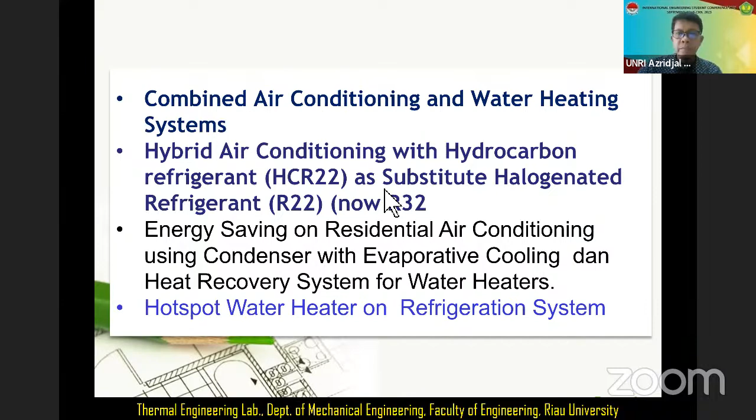Why do we use combined air conditioning and water heating? Because a sizable percentage of electricity generated is consumed by refrigeration and air conditioning systems. In tropical countries, split type air conditioning is generally used in residential and commercial buildings. So in such establishments, electric water heaters are often used to generate hot water. Both air conditioner and electric water heater are generally the major energy consuming devices in the building.

Refrigeration and air conditioning consume around 50% of home electricity and around 19% for water heating. If we combine the use of refrigeration and water heating in one system, we can decrease electricity use in the home.

We can see this vapor refrigeration component, or refrigeration cooling system. We can make efficiency improvements in the condenser component.

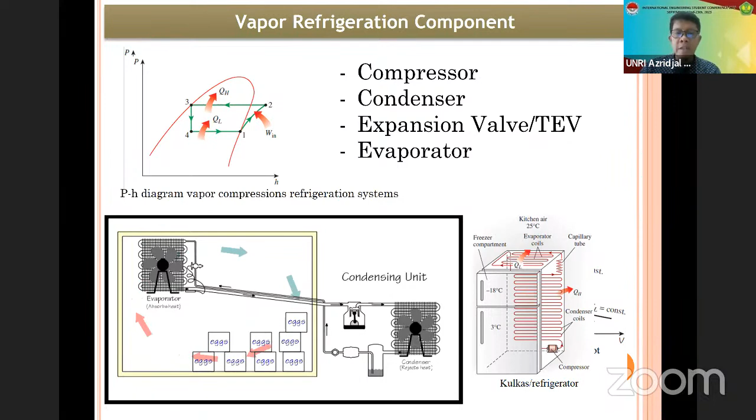If we use a refrigeration system for a cold refrigerated space, we call it a refrigerator. If we use a refrigeration system to warm a house, we call it a heat pump. If we combine the heat pump and refrigerator, we call it a combined refrigeration system. In this system, the refrigeration system can make a cold refrigerated space and also warm the house.

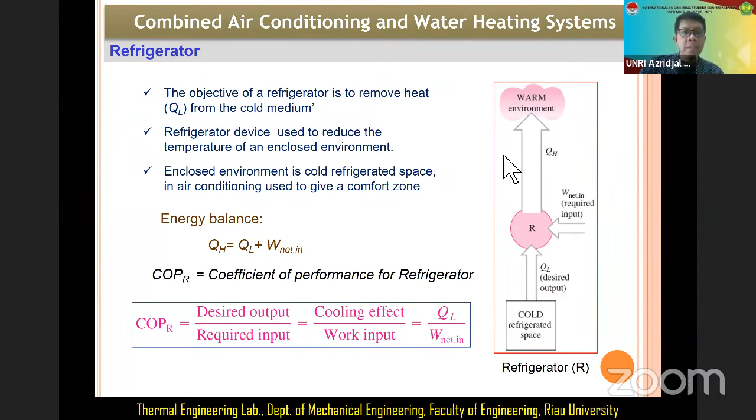This is the combined air conditioning and water heating system: the refrigerator, the heat pump, and the combined refrigerator and heat pump. If we combine refrigerator and heat pump, we can achieve coefficient of performance for both cooling effect and heating effect. This heating effect uses the rejection of energy from the condenser.

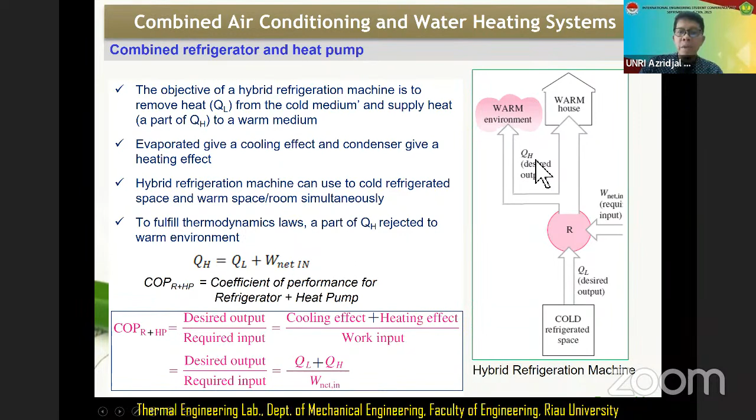This is the main component of a refrigeration system. One is compressor, second is condenser, third is expansion valve, and the fourth is evaporator. The heat rejected from the condenser can be used for heating water, or for drying in other systems.

In this presentation we use heat rejection from the condenser for a water heating system. This area is for heat recovery.

This area is for heat recovery, and if we look at the schematic diagram and TS diagram, the heat recovery is used in this line. We put a heat exchanger between the compressor and condenser, because after the compressor outlet, the temperature of the refrigerant is very high, so we can use this for water heating.

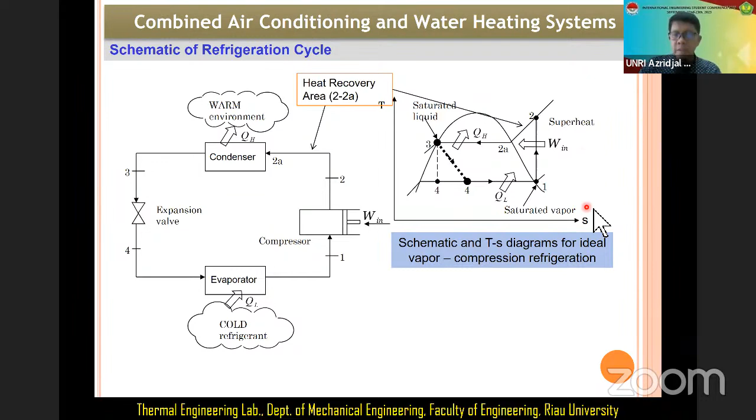This is also the combined refrigeration and air conditioning system. We can use post heat recovery, putting a heat exchanger, or de-superheater, for a reclamation tank to heat water in the tank.

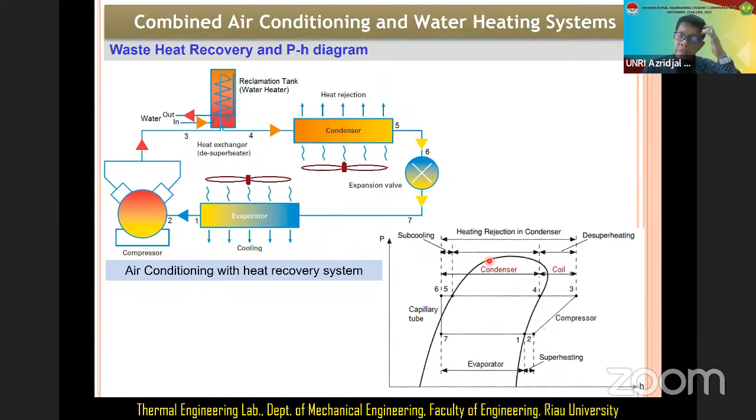After the compressor, we put a water heater reclamation tank, and the refrigerant goes to the water heater tank, and then to the condenser. So the use of this system does not disturb the performance of the existing refrigeration system.

This type of coil condenser can be used in a water heating system, in a water tank, to heat the water in the tank, using the heating effect in the condenser, or the heating effect after the compressor to the condenser.

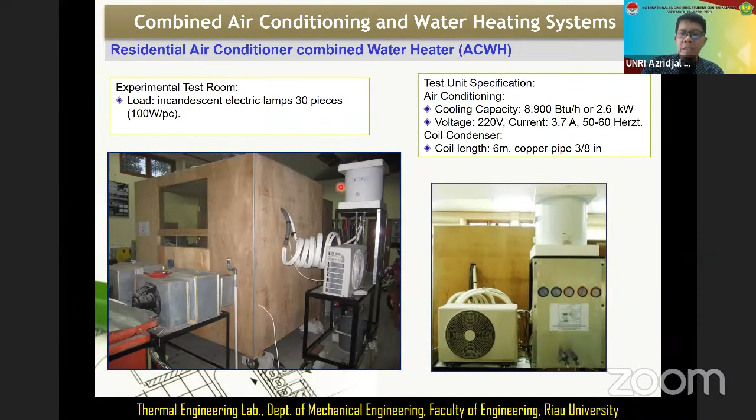Now, going to the conclusion.

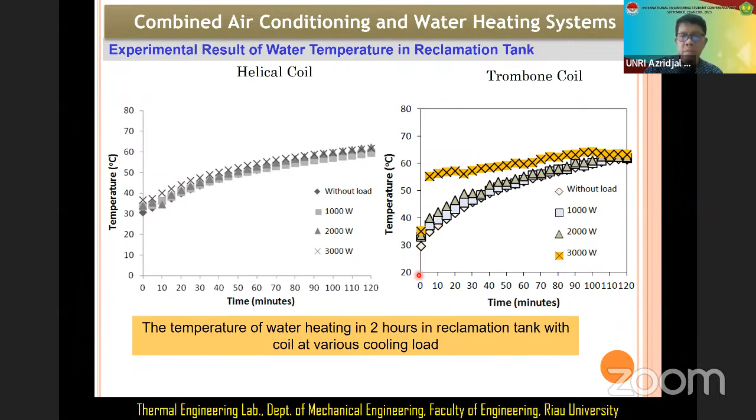In conclusion, we can see the application of air conditioning combined with water heater using coil does not affect the cooling performance, but it can improve energy performance considerably for cooling and heating. The use of trombone coil condenser gives better performance than helical coil condenser. When the cooling load increases, the COP (coefficient of performance) for refrigeration and for heat pump also increases. So we can use this combined air conditioning and water heating system without affecting the cooling performance.

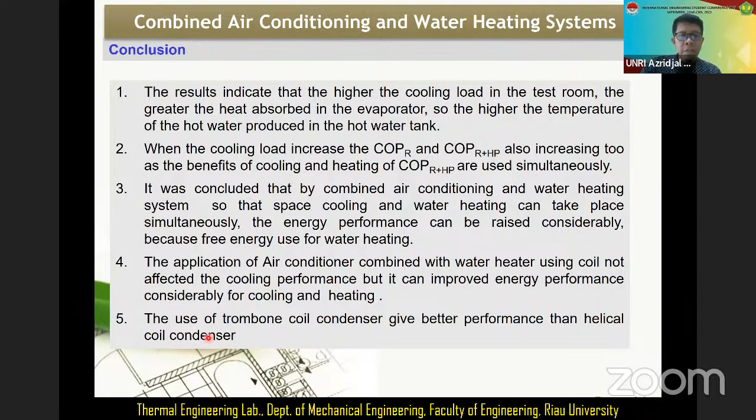Next, for air conditioning with hydrocarbon refrigerant: if we change the refrigerant to a hydrocarbon refrigerant with low GWP and low ozone depleting potential, we can reduce electricity consumption. Previous research shows the application of hydrocarbon refrigerant can reduce electric power consumption by around 10 to 30%. Also, this hydrocarbon refrigerant is environmentally friendly, with zero ozone depletion and very low global warming potential.

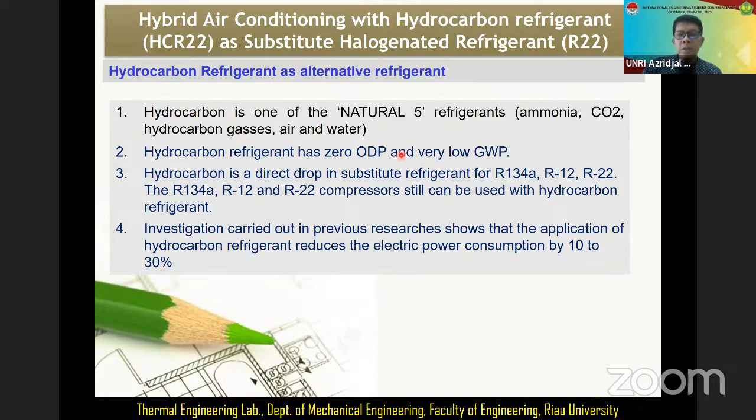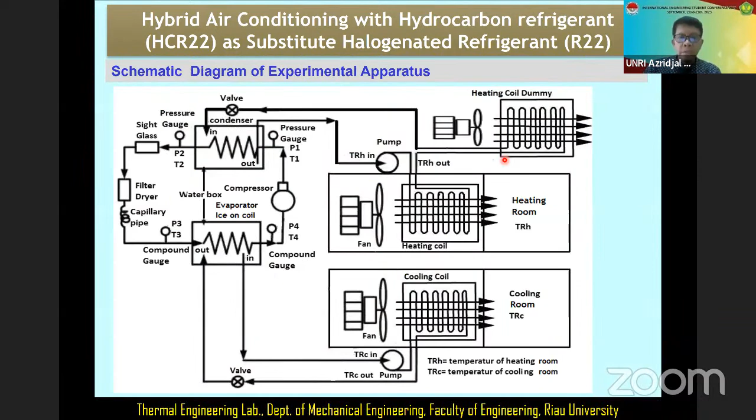This is the advantage of using hydrocarbon as refrigerant. The result is that if we use hydrocarbon refrigerant, the pressure of the condenser is low, and also the pressure of the evaporator is low. If pressure in the condenser, evaporator, or compressor is low, it means the electricity consumption for the compressor is also low. So we can save energy consumption of around 10 to 30%.

Power consumption of the compressor is more efficient, by 25.12% compared to R22, where the condenser and evaporator pressure is also lower than when using R22 refrigerant.

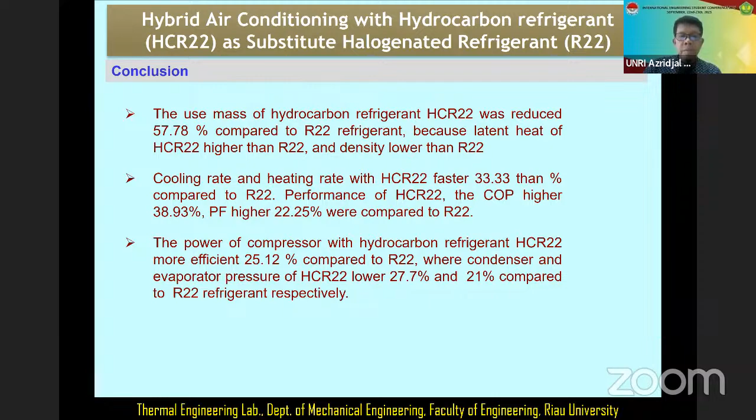Next, this is about energy saving on residential air conditioning using a condenser where we put evaporative cooling in front of the condenser, and we can use a heat recovery system for the water heater. This is similar to the previous research, but we add evaporative cooling to make the air temperature entering the condenser lower than without using evaporative cooling.

If we use evaporative cooling, the temperature entering the condenser can be reduced by around 2 to 5 degrees Celsius. This shows the location to put evaporative cooling to decrease the pressure of the condenser. If we can decrease the condenser pressure, it means we can decrease the electricity consumption for the compressor.

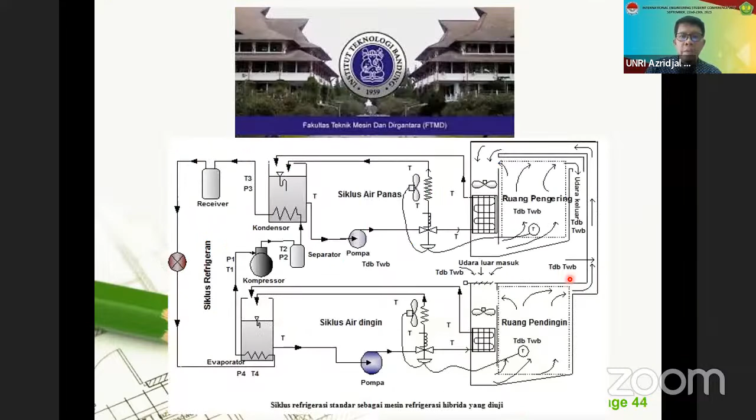We can see that most electricity consumed in conditioning is for human comfort through air conditioning. For hotels it's around 60%, for hospitals around 57%, for shopping malls and government offices around 55%, and in residential homes or office buildings around 47%.

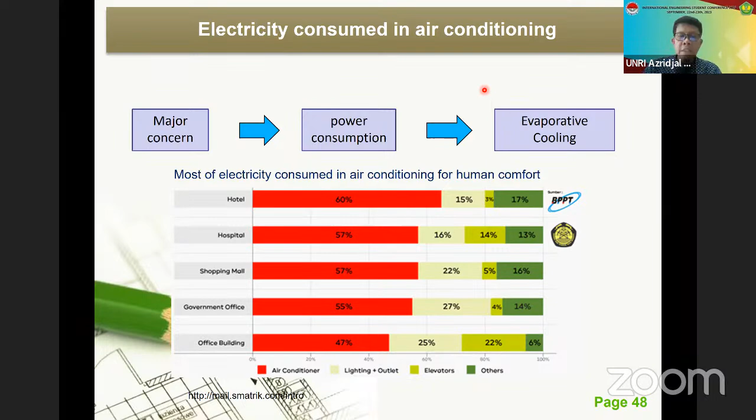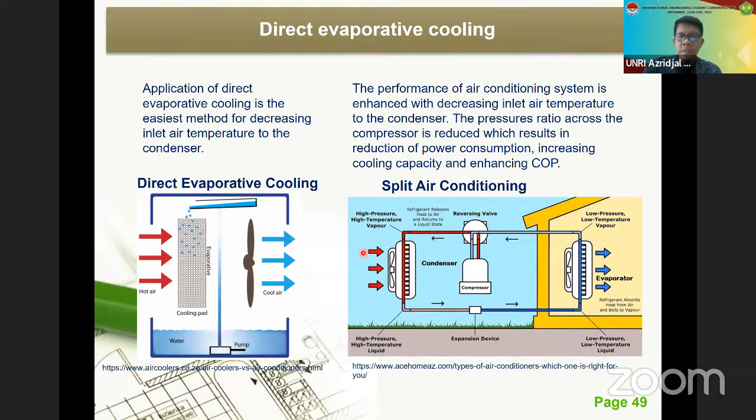If we put evaporative cooling and change the refrigerant, we can decrease the electricity consumption for air conditioning. This type of direct evaporative cooling can be used to decrease temperature before entering the condenser. This is a schematic diagram of split air conditioning with direct evaporative cooling.

To make energy efficiency for the refrigeration system, we can use condensate water from indoor condensation or from the evaporator. We can use this condensate water as the source for direct evaporative cooling. Compressor power consumption decreases due to the decrease in condenser temperature and pressure ratio, which will enhance the overall COP, the coefficient of performance for the refrigeration system.

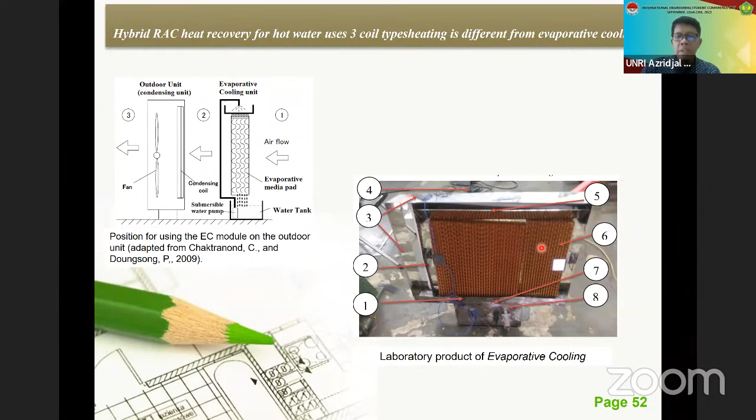We can see this position of the evaporative cooling unit, or modular evaporative cooling. This is the outdoor unit or condensing unit; we put it at the back of the condenser. This is our evaporative cooling product, or module evaporative cooling, that we made in our laboratory.

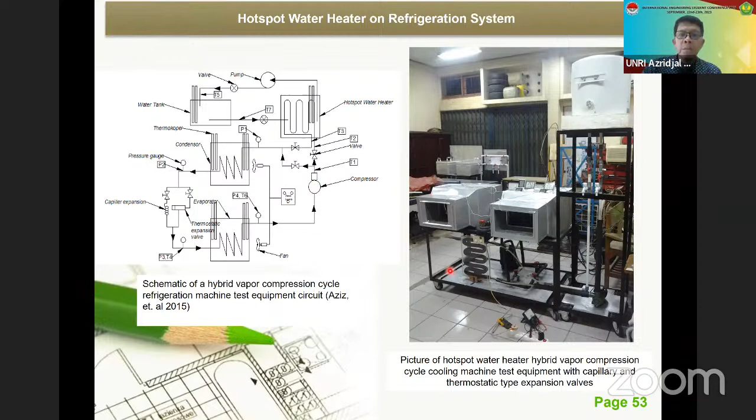In this hot spot water heater system, it's the same as other hot spot water heaters that use hot refrigerant from the compressor to the condenser. This is a photograph of the hot spot water heater in a refrigeration system.

This is a figure of residential air conditioning combined with a water heater system, which enhances the performance of both the water heater and the refrigeration system. Usually now the refrigeration system uses a new model of heat exchanger, with condensers using aluminum micro-channel coil, which is better than condensers with copper pipe coil.

Usually now refrigeration systems use condensers with aluminum micro-channel coil. This is the last part about energy saving on the refrigeration system and air conditioning, where we make modifications in the refrigeration system to save energy for refrigeration and air conditioning.

Why must we save energy in refrigeration systems? Because the use of electricity energy for refrigeration and air conditioning is around 55% for homes, offices, malls, and others using refrigeration systems.

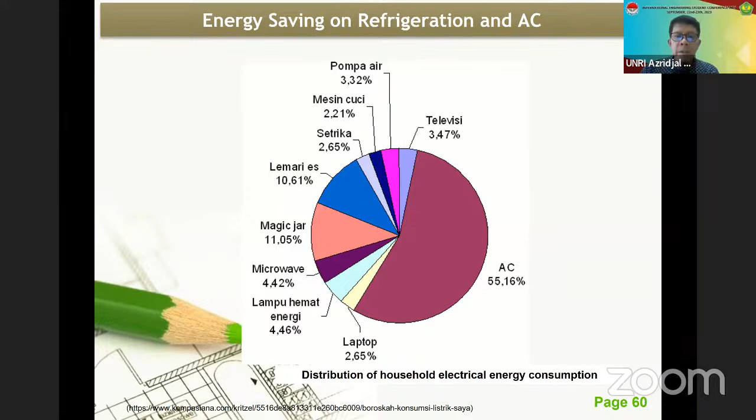Thank you very much, Prof. It's very good and interesting research since we use mostly air conditioning and also refrigerator in our daily life, especially in Padang, it's very hot recently.

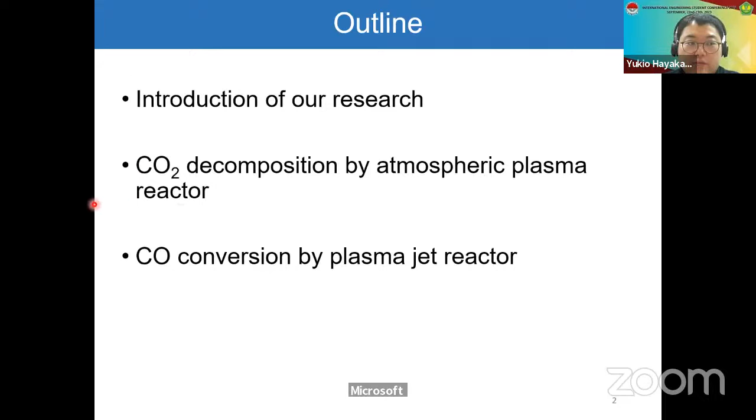My presentation is divided into three parts. First, I will introduce the research in our laboratory. Next, I will present results on CO2 decomposition by plasma. Finally, I will present results on graphite formation from carbon monoxide by plasma jet reaction.

Our laboratory is staffed by two researchers, Professor Kambara and me. Chemical engineering is our field, and we work to solve technical issues related to environmental pollution and energy resources. Recently, our main research topics are hydrogen production from ammonia and carbon dioxide conversion to valuable resources. We use not only chemical processes, but also atmospheric pressure plasma treatment with dielectric barrier discharge called DBD, and photochemical reaction processes with vacuum ultraviolet rays. Today we will talk about CO2 conversion topics related to CO2 processing by atmospheric pressure plasma.

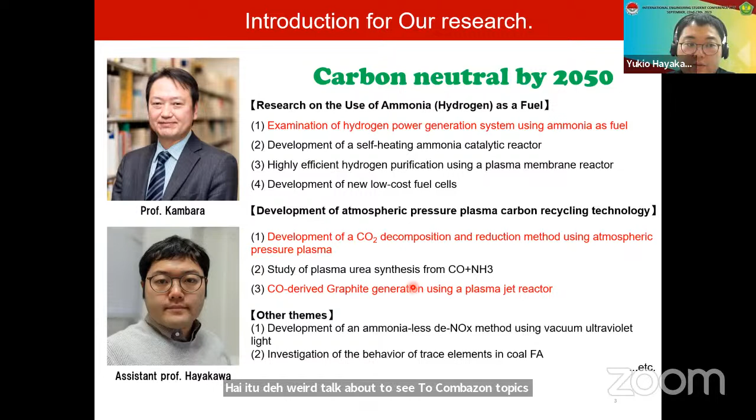Now let's move on to the main issue. I will present CO2 decomposition by atmospheric pressure plasma reactor. Let us begin with the social background of this study. There are many concerns regarding CO2 emissions. CO2 emissions from industrial sites, power plants, homes, and transportation are widely considered responsible for global warming. The high concentration of CO2 in the atmosphere is the main reason for global warming, the global temperature increase, and associated climate change.

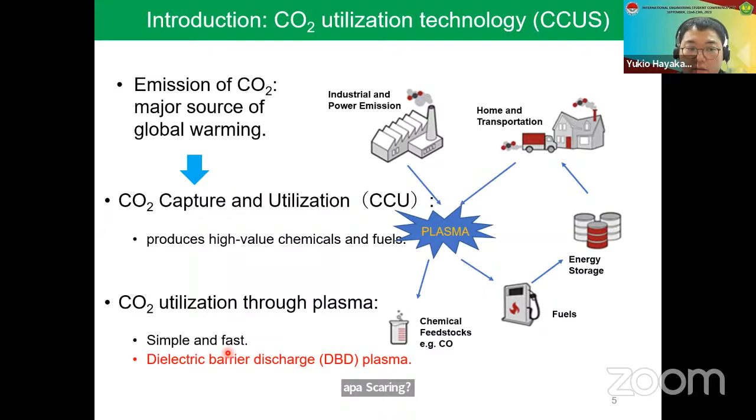One of the solutions to this greenhouse gas problem is carbon capture and utilization techniques, called CCU. CO2 emissions are captured and then utilized to produce high-value chemicals and fuels. For this purpose, non-thermal plasma is a promising method, especially DBD plasma. In recent years, DBD reactors have attracted widespread interest for CO2 conversion due to their simple design, which is beneficial for upscaling for real applications. In addition, these reactors are easy to turn on and off by controlling the electrical power supply.

So now let's move on to the DBD plasma CO2 decomposition. DBD is the electrical discharge between two electrodes separated by an insulating dielectric barrier. The plasma discharge in DBD reactors presents a filamentary form that consists of micro discharges.

When CO2 gas passes through this discharge, it faces a high concentration of plasma electrons, resulting in CO2 dissociation by electron impact reaction. This reaction produces carbon monoxide and oxygen gas, CO and O2. Furthermore, these reactors typically operate at atmospheric pressure and near room temperature.

The main reaction for CO2 decomposition is electron impact reaction, with an activation energy of about 7 electron volts. Whereas DBD can provide electron energy in the range from 1 to 10 electron volts.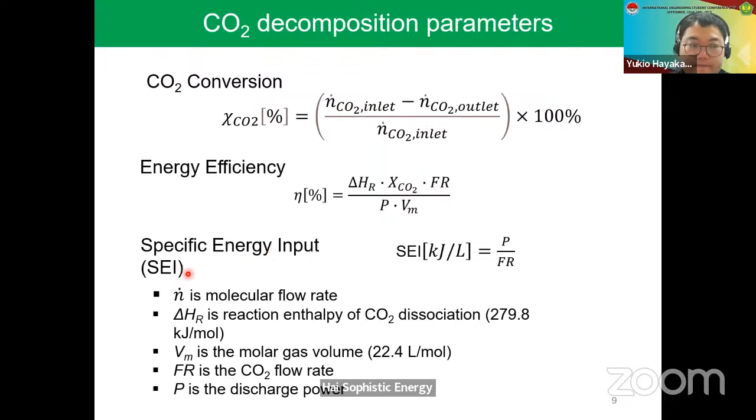Here we can see the applied voltage and current waveform of the impulse DBD reactor. Both the rise time and the fall time of impulse voltage are about 2 microseconds, with a pulse repetition frequency of 10 kilohertz. The impulse power supply is manufactured by Haiden Laboratories in Japan.

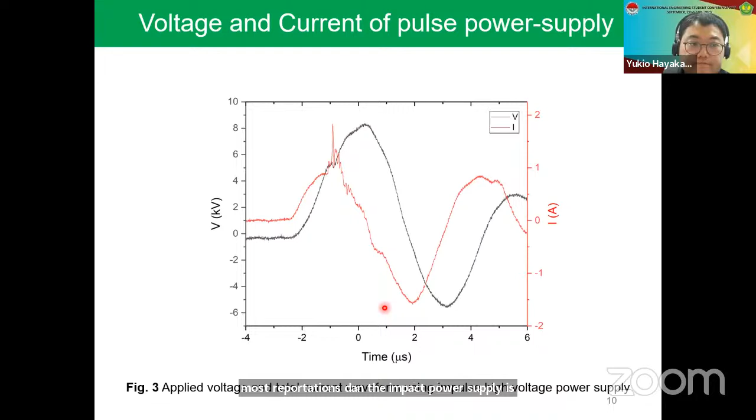So first, let's look at the effect of discharge power on the CO2 decomposition. This graph shows the influence of discharge power on CO2 conversion and energy efficiency. Increasing discharge power increased CO2 conversion, but decreased the energy efficiency. A trade-off relationship between CO2 conversion and energy efficiency can clearly be seen, where a high CO2 conversion is achieved at low energy efficiency.

For example, CO2 conversion increases from 10.17% to 20.25%, as the discharge power changed from 34 to 101 watts, whereas the energy efficiency decreased from 6.47 to 4.17%. This is a technical issue of CO2 dissociation by atmospheric pressure plasma.

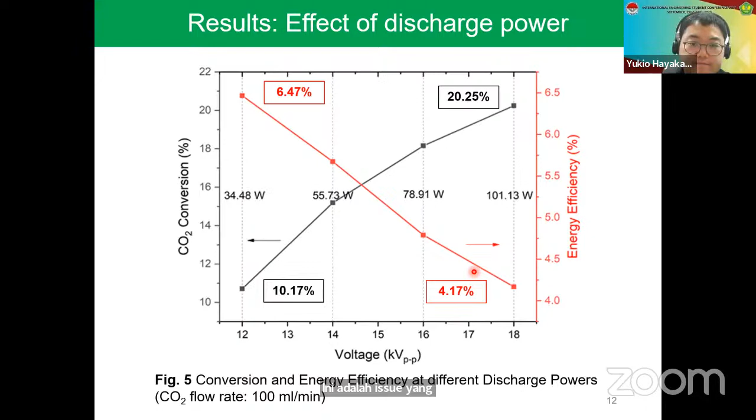This figure shows the current waveform for different discharge power. The non-streamer formation was observed at the applied voltage of 12 kV.

Increasing the applied voltage to 14 kV produced the streamer formation, changing the discharge regime to a combination of uniform and filamentary mode. The formation of the streamers suggests electron impact reaction channels for CO2 dissociation. In addition, a higher current peak means a higher density of electrons and ions, resulting in more reactive plasma. This condition might contribute to the higher CO2 conversion at a higher discharge power.

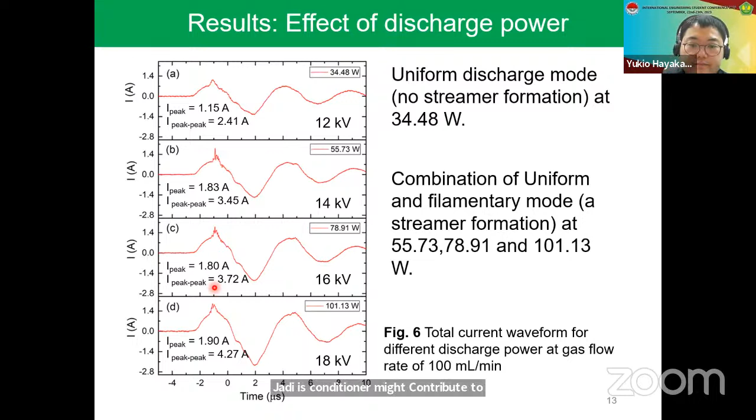Furthermore, the discharge power of the impulse DBD does not affect the streamer intensity. This is a contrast with the conventional alternating current DBD, where low discharge power and high discharge power differ. However, increasing discharge power gives rise to the peak value of streamer and the overall peak-to-peak value of discharge current.

Let's look at the effect of the gas flow rate as shown in this graph. The residence time of CO2 gases in the plasma reactor decreased from 9.7 seconds to 1.9 seconds as the flow rate increased from 20 to 100 milliliters per minute. And the CO2 conversion decreased from 51.42% to 15%. The reduced residence time of reactants in the plasma decreases the possibility of collision with electrons and chemical reactive species, consequently lowering the CO2 conversion.

On the other hand, energy efficiency of reaction was increased from 4.1% to 7.2% by increasing the feed flow rate. However, further increase of the gas flow rate to 100 milliliters per minute reduced the energy efficiency. This lower energy efficiency is due to considerably lower CO2 conversion value at a gas flow rate of 100 milliliters per minute.

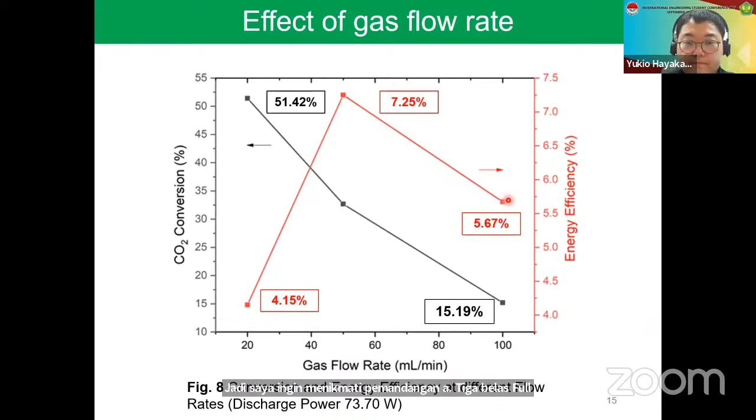Now let's look at the last part of the experimental results, which is the effect of specific energy input, SEI. The variation of SEI can be achieved by changing the discharge power and gas flow rate. How we change the SEI has a different influence on the CO2 conversion and energy efficiency. From figure 10, we can see that changing the SEI by varying the gas flow rate results in a better increase, from black symbol to blue symbol.

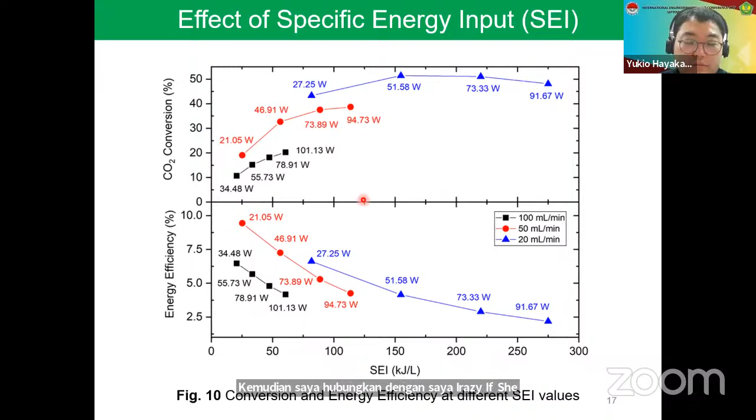This slide shows a summary of the CO2 decomposition by DBD. A very high CO2 decomposition rate, about 50%, was obtained by combining the microgap DBD with an impulse power supply. The gas flow rate and the streamer intensity were found to play a more dominant role in CO2 conversion than discharge power or peak-to-peak current. For future research, the impulse power parameters such as rise time and repetition frequency need to be optimized to increase the energy efficiency.

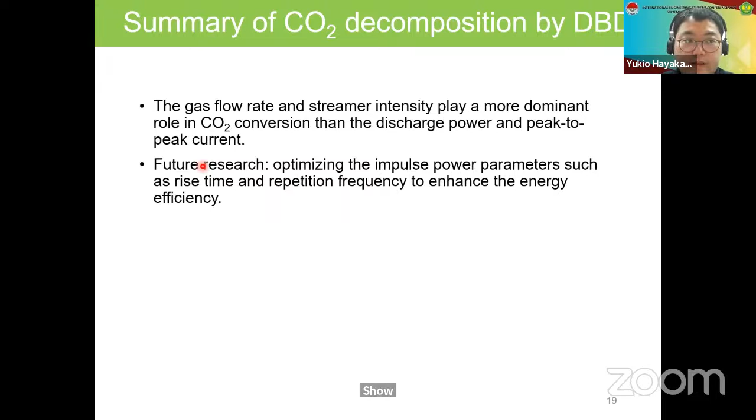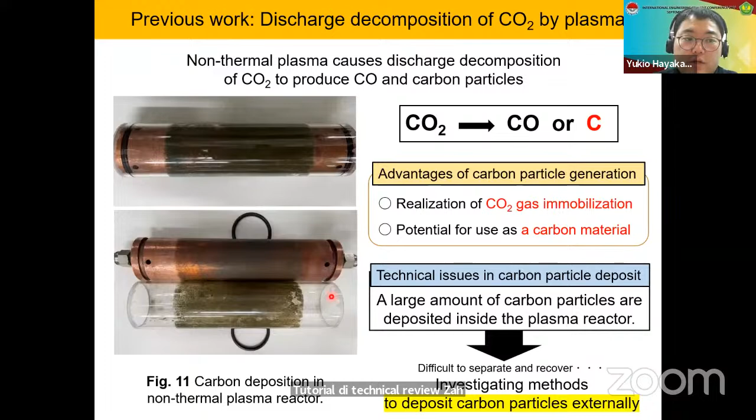To solve this technical issue, the adaptation of plasma jet technology was investigated as a method to separate and recover carbon particles. The plasma jet is a method that can irradiate the excited gas by DBD to the outside, as shown in figure 12. Figure 13 shows a photograph of a plasma jet in which argon plasma is externally irradiated from the device. Various types of plasma can be radiated to the outside by a plasma jet reactor. In this study, external deposition of carbon was attempted by irradiating carbon monoxide plasma onto an outside target for carbon particle deposition.

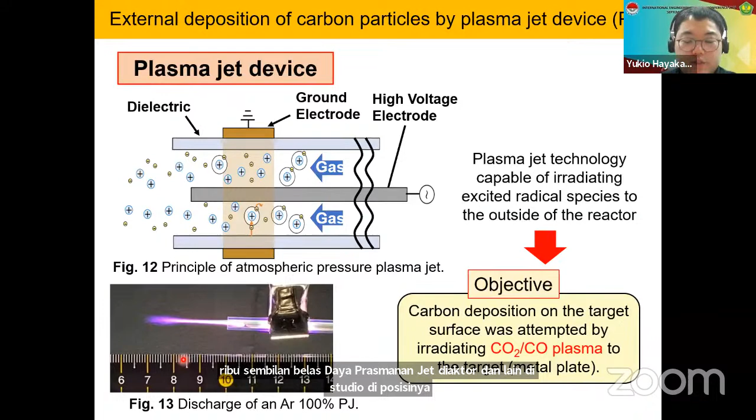This slide shows an overview of the plasma jet device. It consists of a high voltage rod, a quartz tube, and a copper foil for the ground electrode. The sample gas is excited in the gap between the quartz tube and the high voltage electrode rod, and the excited gas is irradiated through the gas outlet.

This figure shows the experimental setup for irradiating the target with CO plasma. The plasma jet device was installed in a desiccator. The plasma was irradiated to the target as shown in figure 16. The carbon particles were deposited on the target. In this photograph, the target is a nickel plate.

The distance between the plasma jet and the target could be changed. The inside of the desiccator can be filled with nitrogen gas or air.

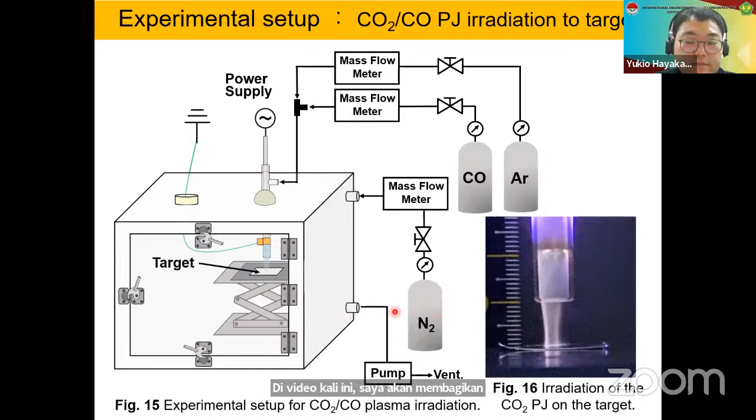This slide shows experimental conditions for CO plasma irradiation experiments. We use mixing gas, and CO concentration is 50%, diluted by argon gas. The gas flow rate is set to 1.5 liters per minute.

The power supply condition: applied voltage of plasma irradiation is set to 17 kV, and repetition rate is set to 10 kHz. The irradiation distance between the plasma jet device and the target is set to 10 millimeters, and the irradiation time is varied from 30 to 90 minutes.

Atmospheric gas used is air or nitrogen gas in the desiccator. We use six kinds of targets: nickel, copper, iron, aluminum, and paper and wood material targets.

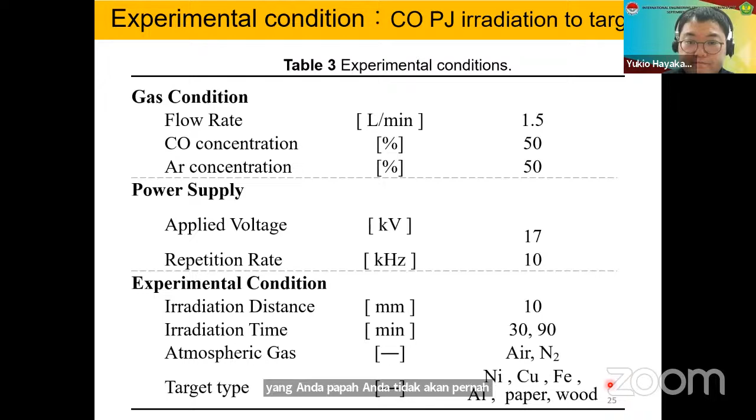This slide describes the result of irradiating a nickel plate with carbon monoxide plasma. The photo on the left shows the nickel plate irradiated with CO plasma. Black particles were deposited on the plate. The particles were observed under magnification by SEM, at a magnification of 30 times.

The particles were deposited in a reticulate pattern on the plate. This suggests that the carbon particles were deposited after the reaction between the nickel plate and the CO plasma.

Now let's observe the carbon particles more magnified. This photo is at higher magnification, about 5,000 times.

When the target was irradiated with CO plasma, many carbon particles were deposited. This result indicates the carbon particles were produced via carbon monoxide, and the carbon particles were deposited to coat the target. Carbon particles of various sizes were deposited: big size, small size, various size.

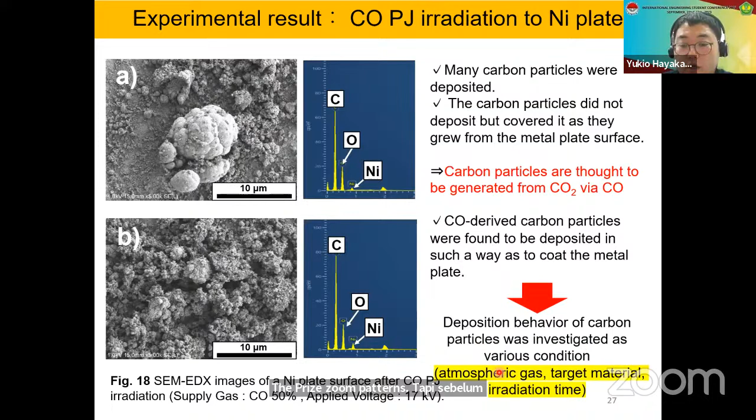Presumably, the carbon particles were deposited on the plate and grew in size. Based on these results, various conditions were changed, for example atmospheric gas, target materials, and irradiation time.

The argon gas became argon plasma by DBD, and it excited oxygen in the ambient gas. The excited oxygen reacted with the carbon particles to form carbon monoxide or carbon dioxide. Therefore, it is considered that the carbon particles were not deposited in the air condition.

This slide shows the effect of plasma jet irradiation time. The right side shows an irradiation time of 30 minutes, and the left side shows 90 minutes. When the irradiation time was short, the size of deposited carbon particles was small. The size of carbon particles increased as the irradiation time increased. It was found that the carbon particles grew in size with irradiation time.

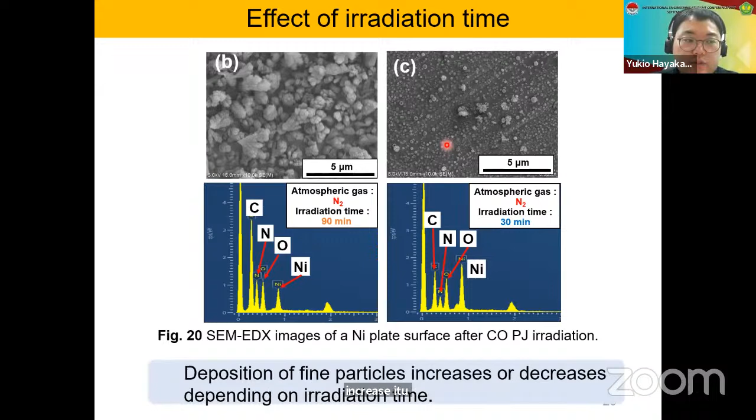Finally, the carbon particles obtained in this experiment were structurally analyzed by Raman spectroscopy. The obtained particles had a strong peak in the G band at about 1581 Kaiser. This result indicates that the carbon particles obtained from carbon monoxide have a graphite structure, and the carbon particles have the potential to be used as carbon electrodes.

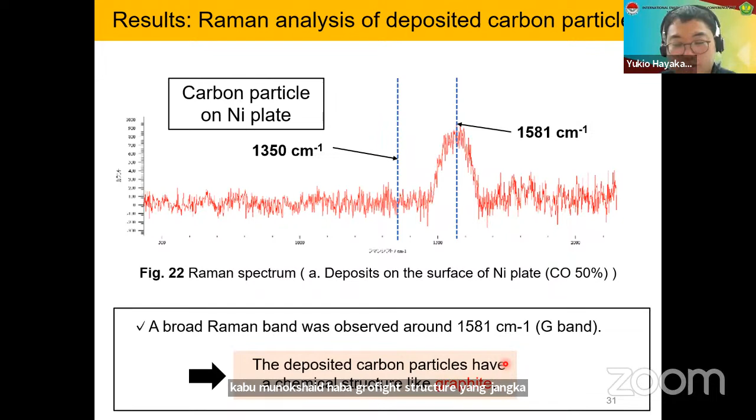So this is the summary. The summary will be omitted as it is beyond the time of the presentation.

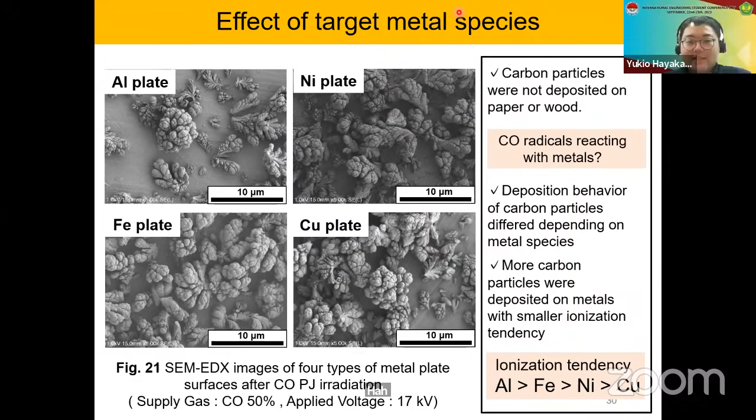Thank you, Sensei, thank you so much. After this, if you have a question or opinion, please send a message to Dr. Elda-san, or directly to me. For all audience, if you have a question, you can send it by email, maybe to Erda, or direct to me. You can send a question by mail. Thank you very much, Sensei, for the interesting topic today. Sama-sama. Bye, Sensei, bye. Okay.

Okay, thank you moderator. Thank you for the opportunity to present my material related to choosing the type of mass public transportation for cities in developing countries, case study regarding LRT in Palembang. My material is very general, hopefully everyone can follow my presentation easily. My name is Joni Arliansyah. I am the head of the transportation laboratory in the Civil Engineering Department, Faculty of Engineering, University of Sriwijaya.

To choose the mass transportation option in a city, we begin with a question about which type of mass public transportation suits the character of the city. To fulfill this purpose, we have to make a plan to guarantee that we don't make a wrong choice in public transportation, because the choice of public transportation option is a choice about the future of the city.

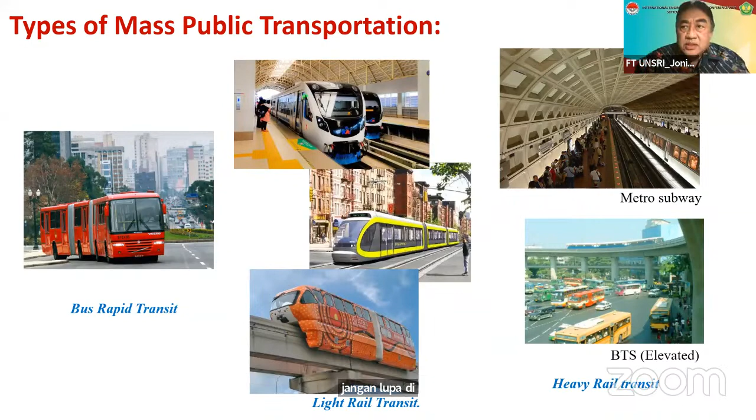Another question is, what factors are the main consideration in choosing the type of mass public transportation for cities in developing countries? Many considerations have to be looked at, but today I will explain the three main considerations that form the basis to choose the type of mass public transportation.

First is travel demand needs, construction cost, and construction time. These three main considerations will answer what type of mass public transit is suitable for your city.

After that, I will discuss about LRT in Palembang - what is the problem about demand, what is the problem about the construction cost, and so on.

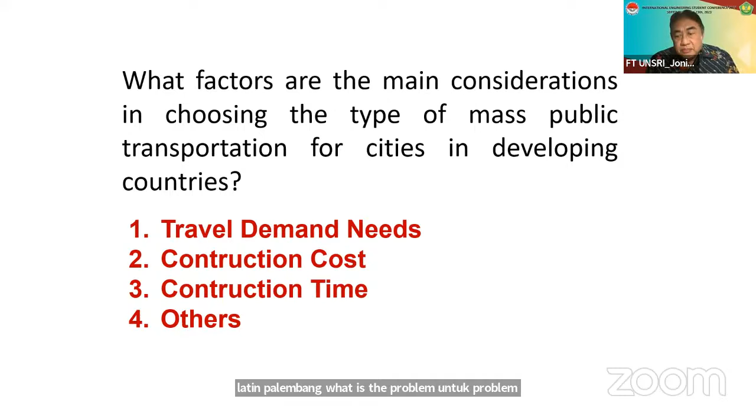Okay, we start with the travel demand needs. Demand projection is very important to get the demand that will be loaded to the system. Demand projection is needed to determine which kind of transportation type, and how much demand to serve.

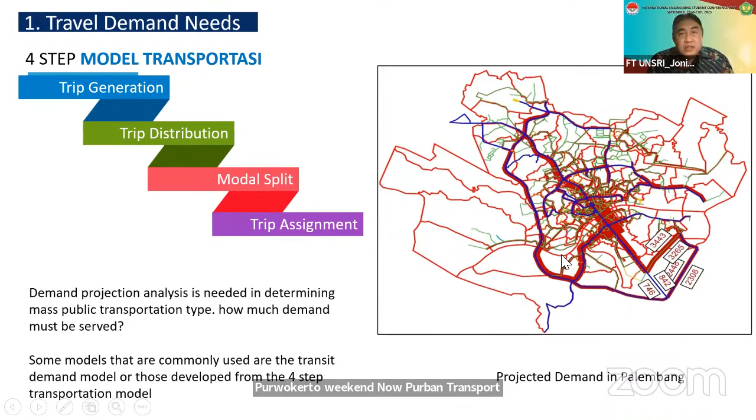This is the projected demand model in Palembang. This result is based on simulation in our laboratory. This shows us how much trip will flow in a link, for example in the road. Also the flow that flows in the rail line, something like this. This is important - after we get the flow, we can know which type of urban transport can serve the demand. This is the example produced from simulation.

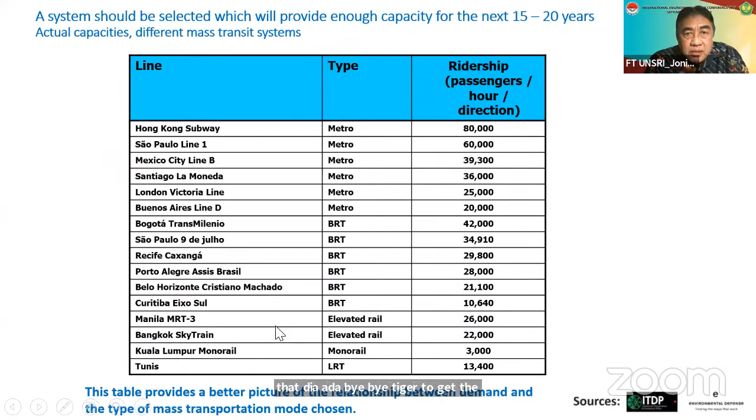How many million per kilometer? I calculate today in rate of dollar. $1 million is about 15,398 million per kilometer.

So it means that if you don't have a lot of money, for example if you have 3,000 passengers per hour that must be served, you can use the cheaper one, BRT. If you have enough money, you can choose elevated rail, mass rapid transit, or underground metro. So it's very important. If the city doesn't have a lot of money for construction and maintenance, you can use the cheapest one. BRT is the cheapest, I think.

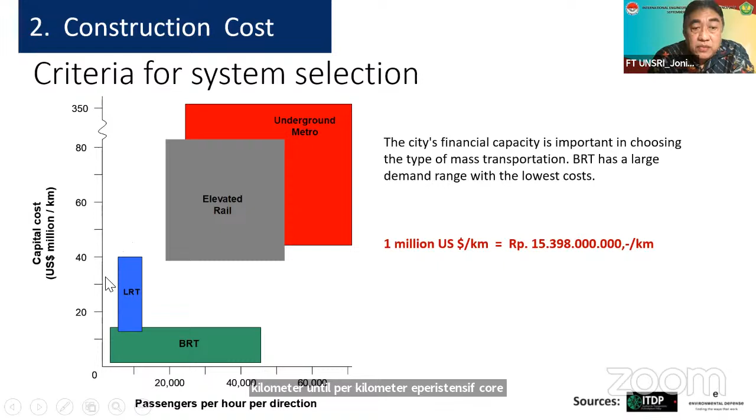And then construction time, the third factor. BRT is very fast to construct, about 1 to 2 years, and LRT about 2 to 5 years. But in Palembang, because at that time, 2017-2018, there was the Asian Games opening in late 2018, the LRT was built in only about 1 year.

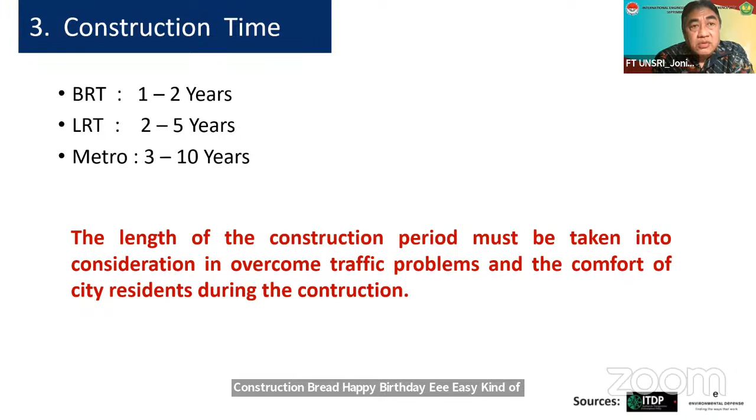Metro, because it needs very high technology - for example we have to build underground or elevate the rail - takes a very long time, about 3 to 10 years. The length of the construction period has to be taken into consideration: can it overcome the traffic problem in the near future? Also during construction, sometimes it's not convenient because the comfort of residents will be minimized due to the construction work.

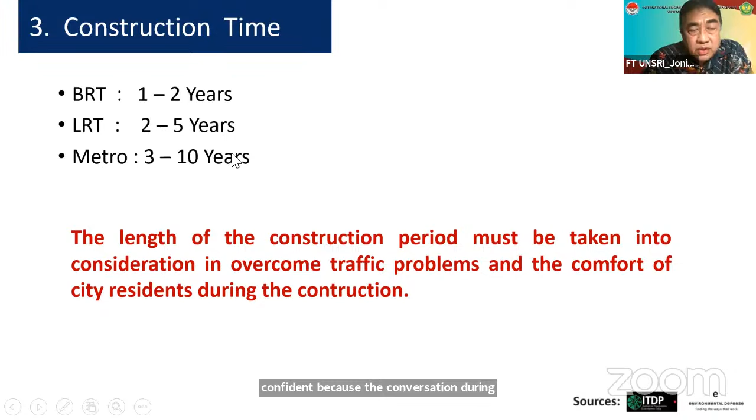Okay, that's the basic of how to use the LRT. I will talk about the LRT in Palembang. The length is about 23.4 kilometers with 13 stations. If you've visited Palembang, you will meet the LRT at Bandara station, and finally we finish at Jakabaring station, the JKA station, the final one.

And then construction cost is very expensive, about 10.9 trillion rupiah. It's very expensive - there was a lot of discussion about the construction cost at that period. Why did this project still run? It still ran because the reason to build that LRT was to support the Asian Games, with inaccurate demand prediction.

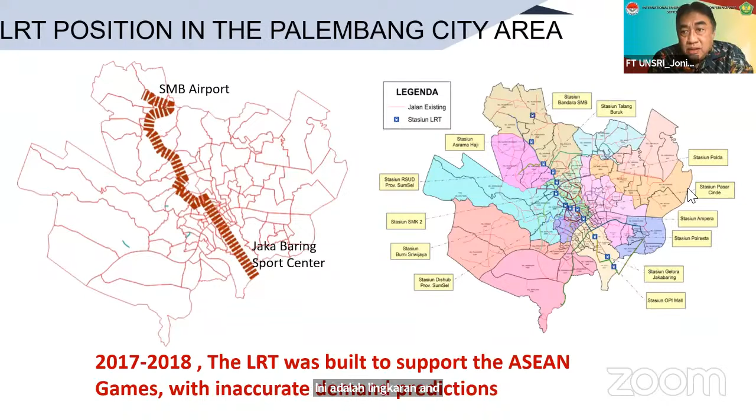This is the link of the LRT, and these are the Kecamatan sub-districts in the city, a lot of sub-districts. I will show you the demand using the origin-destination matrix, because the prediction of this projection demand was not so accurate, and it doesn't serve much for travel purpose because the origin-destination is not only on this line - it's everywhere, everybody wants to go somewhere. So at that time, and until now, we have a problem with the travel demand of the LRT in Palembang.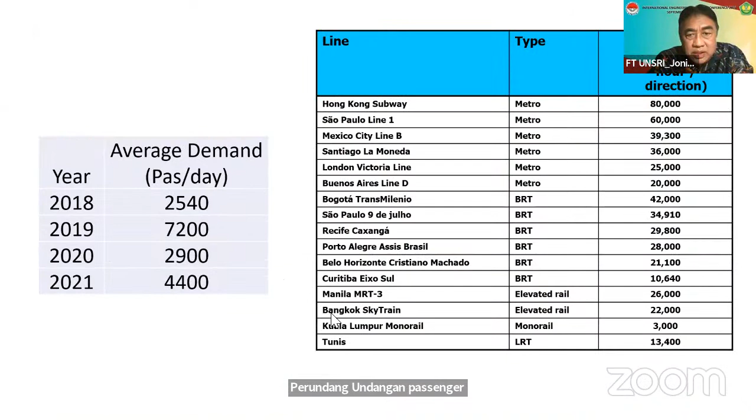In 2018 it was only open for the Asian Games. In 2019 it opened to the public, and at that time it was only about 7,000 passengers per day - not passengers per direction per hour, passengers per day. If you compare with Kuala Lumpur for example, it's only 3,000, but 3,000 passengers per hour per direction. This in Palembang is only 7,000 passengers per day.

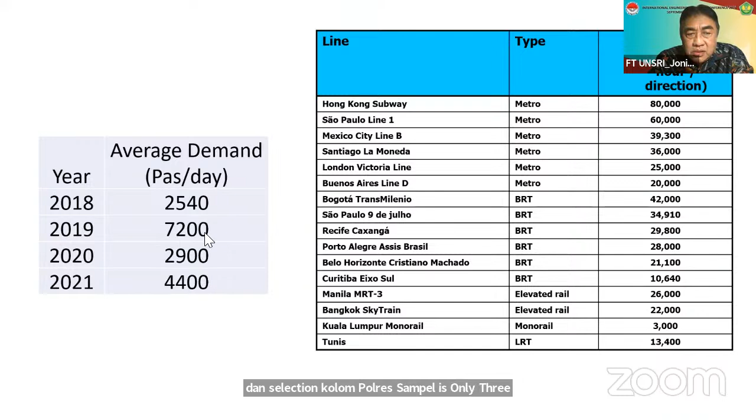After this, during the pandemic, the demand decreased to 2,000-2,900, then up to 4,000, becoming better in 2021. This is the problem.

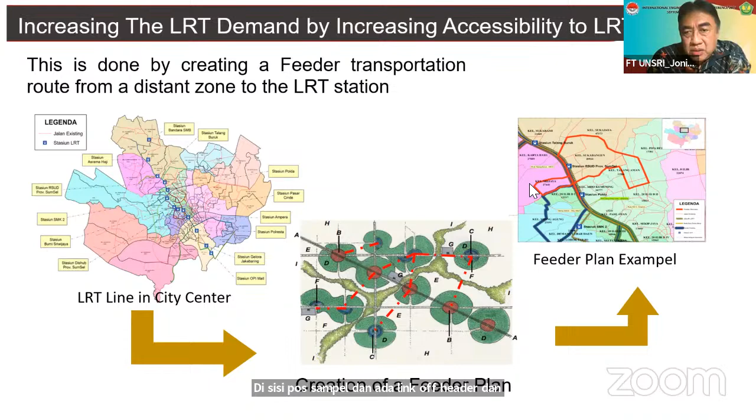So there were many efforts to increase LRT demand. The government made a feeder transportation system. This is the link, and we have centers of activity near the line. So the feeder means creating a connection link between the center of activity and the station. This is, for example, the link of the feeder that has been done, and also in our laboratory we have many studies to make a good link for the feeder. The government opened the feeder for LRT on July 7th, 2022. This is the picture of the feeder system - it's very convenient and very cheap.

In 2023, until July, we only have 12,000 - the average demand is only 12,000 passengers per day. So until now, we still need other strategies to increase passengers.

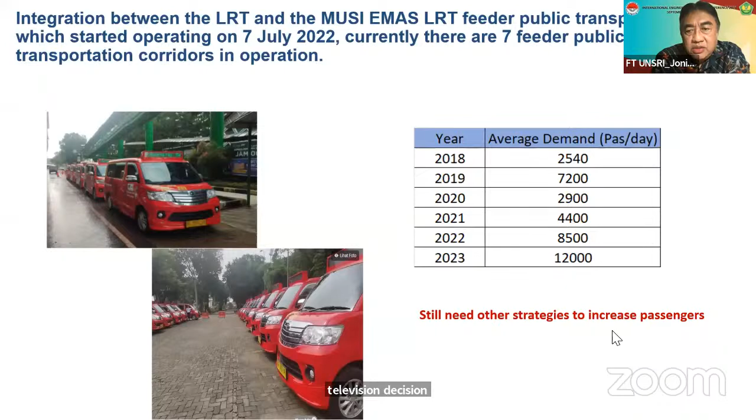This is research about this city, how to make demand for LRT increase. First, build park and ride facilities for bicycles and motorcycles at all LRT stations. Second, sidewalk facilities for pedestrians connecting to residential areas to the LRT, so the trottoir must have a renovation for pedestrians, making a new pedestrian link from residential areas to LRT stations, plus park and ride facilities for cars with a big space, crossing bridges, pelican crossings, and the city also tries to implement transit-oriented development (TOD) at LRT stations.

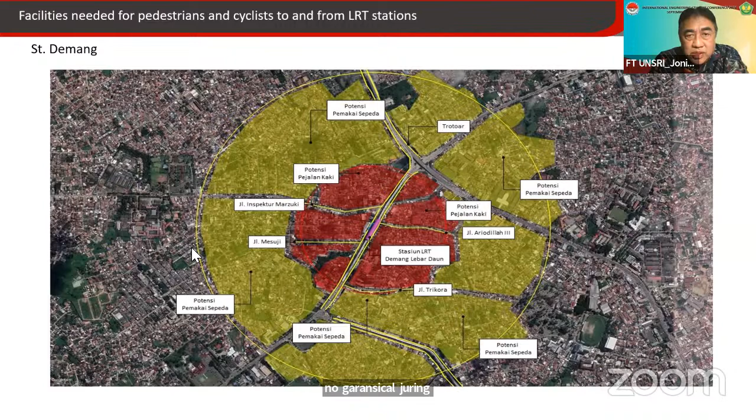This is the concept of TOD. TOD makes the station a center of activity.

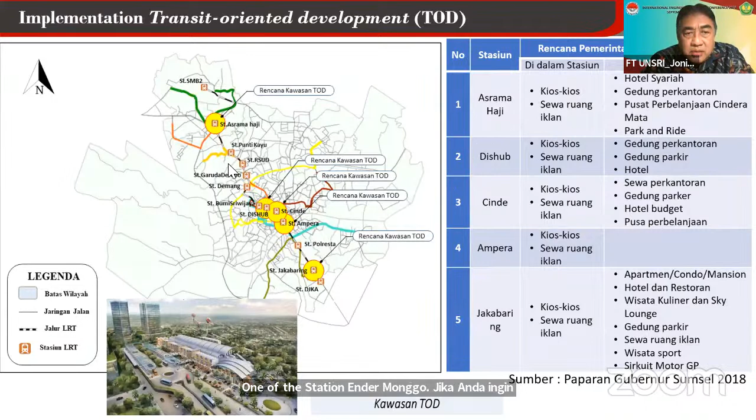There is a TOD place that has been designed in Palembang - Asrama Haji will be one of the stations. There will be a hotel, office, mall, and park and ride here. It's already planned, but during the pandemic and until now, there's maybe no investor wanting to build the TOD. Another TOD system in Cinde is already built about 20 or 30%, and now it's stopped because of an investment problem.

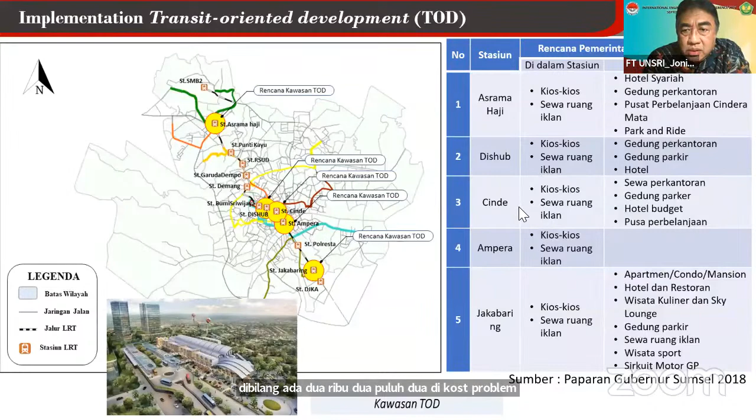So that's the story about the LRT in Palembang. There's also an idea that at the station, in the central area, we can facilitate restaurants and cafes at the station so everybody can enjoy food and coffee. This is still running, but not so successful, I think.

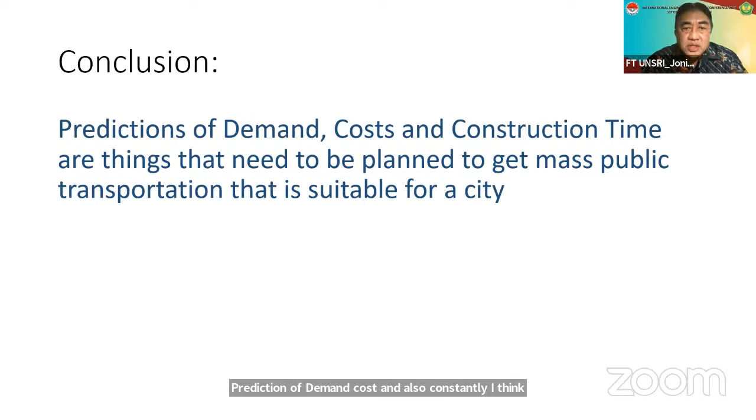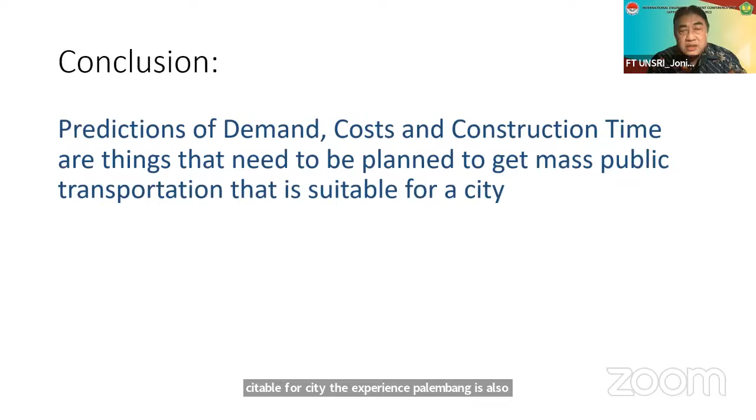Here's a brief conclusion from our discussion this afternoon. Prediction of demand, cost, and construction time are things that need to be planned to get mass public transportation suitable for a city. The experience in Palembang is also a lesson learned for us to build other types of mass transportation in other cities in Indonesia.

Thank you very much.